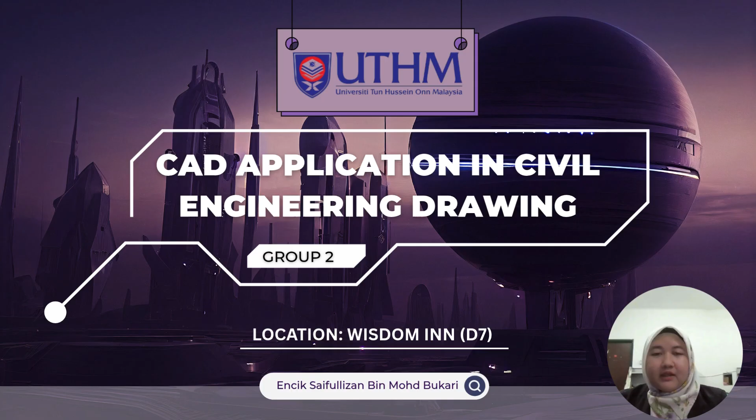Our location is at Wisdom Inn D7. I will explain about our company, CODraftX Consultant Sdn Bhd, a Malaysian-based company specializing in technical drawing services using AutoCAD, offering comprehensive solutions for construction, mechanical, electrical, and landscape industries, focusing on precision, quality, and fast delivery.

Our vision is to become Malaysia's leading reference company in high quality technical drawing services. Our mission is to deliver professional and precise technical drawing services, meet client requirements efficiently and promptly, and support industry development with the latest technologies.

Our services include architecture drawings, mechanical and electrical, structural drawings, 3D modeling and rendering, and technical drawing construction and review. Our company's strengths are an experienced and trained team, high quality accurate drawings, competitive pricing, and friendly, reliable customer support.

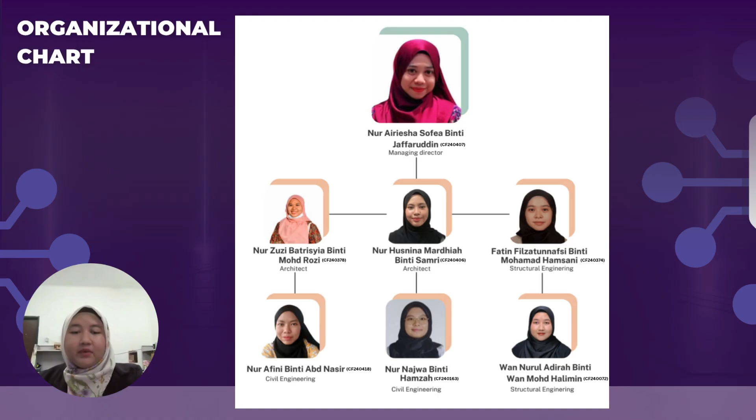This is our organizational chart. We start with Nur Airiesha Sofea binti Jaffaruddin, the managing director; Nur Zuzi Batrisyia binti Mohd Rozi, the architect; Nur Afini binti Abdul Nasir, civil engineering; Nur Husnina Mardhiah binti Samri, architect; Nur Najwa binti Hamzah, civil engineering; Fatin Filzatunnafsi binti Mohamad Hamsani, structural engineering; and Wan Nurul Adirah binti Wan Mohd Halimin, structural engineering.

Our group has chosen the site location which is Wisdom Inn in UTHM. Wisdom Inn is located at the Centre for Diploma Studies, UTHM Parit Raja, Johor, selected for its simple yet structurally challenging 4-level design, ideal for both architecture and civil engineering analysis.

Strategic location, near major retail outlets such as Lotus and commercial complexes, with convenient access to daily needs and leisure activities for students. The UTHM Parit Raja campus is fully equipped with modern academic and daily facilities, providing a conducive environment for student learning and project-based work.

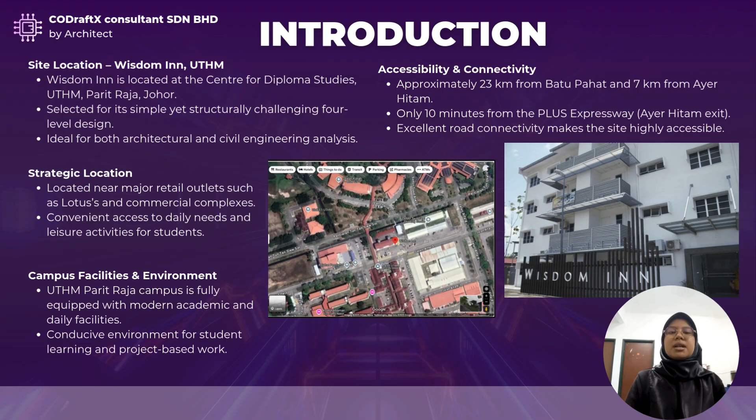Accessibility and connectivity: approximately 23 km from Batu Pahat and 7 km from Ayer Hitam, only 10 minutes from the PLUS Expressway Ayer Hitam exit. Excellent road connectivity makes the site highly accessible.

For the features of the building, Wisdom Inn has a four-level student residence located at UTHM Parit Raja, Johor. It is strategically located, 4 minutes to Taman University and 9 minutes to Parit Raja town, with easy access to the cafeteria, G3 Hall complex, and campus bus stop.

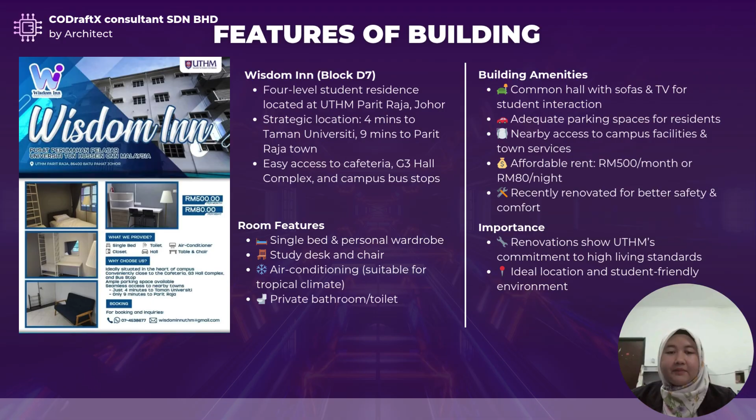For room features, it has a single bed and personal wardrobe, study desk and chair, air conditioning, and private bathroom. Building amenities include a common hall with sofa and TV for student interaction, adequate parking spaces for residents, and nearby access to campus facilities and town services. It is affordable to rent, at 500 ringgit per month or 80 ringgit per night, and has been recently renovated for better safety and comfort.

I will explain the materials used in construction and the importance of material selection. First, materials ensure structural strength, functionality, comfort, and sustainability. This is crucial in apartment-style buildings like Wisdom Inn at UTHM, supporting a safe, durable, and eco-friendly living space.

Structural materials include reinforced concrete for foundation, beams, slabs, and columns; steel, with high tensile strength used in load-bearing support; and clay brick or concrete block for partition walls, durable and fire resistant. Finishing materials include plaster and gypsum board for smooth, fire-resistant interior walls.

Ceramic tiles provide durable, water-resistant flooring for bathrooms or general areas. Paint and coating offer visual appeal and protection against moisture. Glass with aluminum frames are used for modern windows, with corrosion resistance.

Utility materials include pipes and fittings such as PVC and copper for corrosion-resistant plumbing, and electrical wiring using copper and aluminum for safe and efficient circuits. Thermal and acoustic insulation improves comfort and noise control. Roofing uses concrete tiles or metal sheets for durable weather protection.

Innovative and sustainable materials include recycled waste materials used in bricks for sustainability, and low carbon cement to reduce environmental impact, tested by AMEL UTHM, featuring innovative concretes and advanced blends.

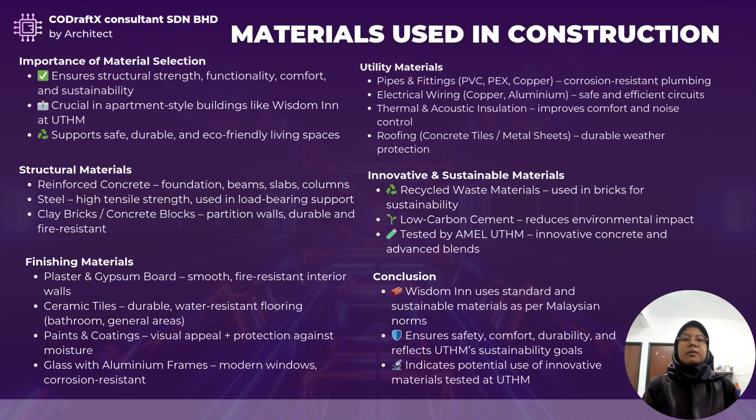In conclusion, Wisdom Inn uses standard and sustainable materials as per Malaysian norms, ensuring safety, comfort, and durability, reflecting UTHM's sustainability goals and indicating potential use of innovative materials at UTHM.

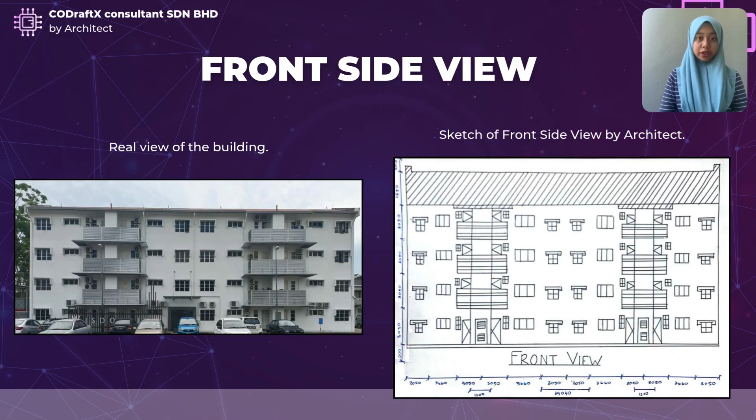So the sketch is a simplified version, but it is useful as a reference before we move into more detailed CAD drawing. Next, we continue to the second slide, which is a front side view sketch and AutoCAD drawing.

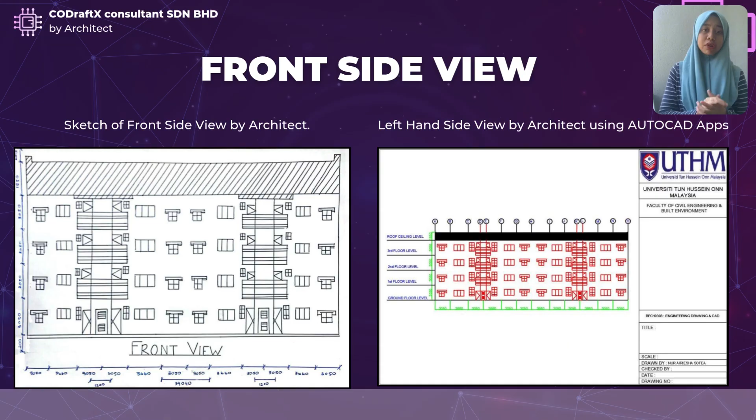This slide shows two types of building views. On the left, we have the manual hand sketch of the front elevation, which shows the arrangement of windows, doors, balconies, and staircase. On the right, we can see the left-hand side elevation produced using AutoCAD software. This drawing provides more accurate measurements and technical details which are important in actual construction. By using AutoCAD, the building dimensions, window placements, and floor levels are clearly identified to ensure the design follows the specifications and standards required.

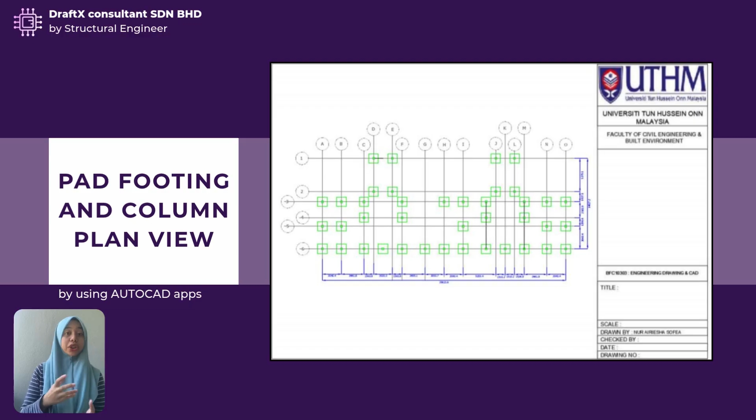This plan is very important because it will guide the contractor during the foundation stage to make sure all the columns are properly aligned and positioned based on the design. Without this plan, it will be difficult to ensure the structural stability of the building. It also helps to prevent any possible errors in construction.

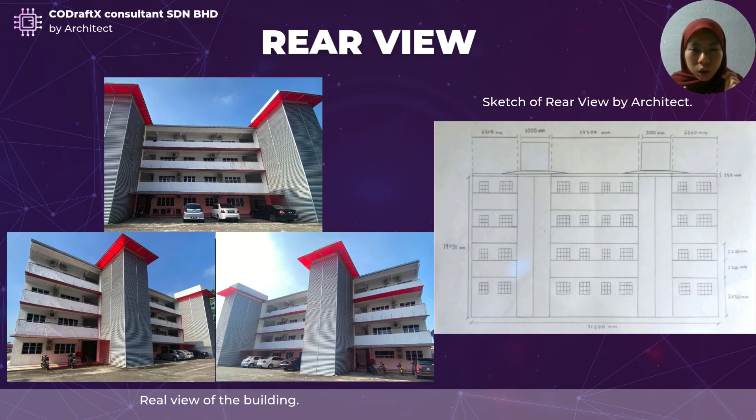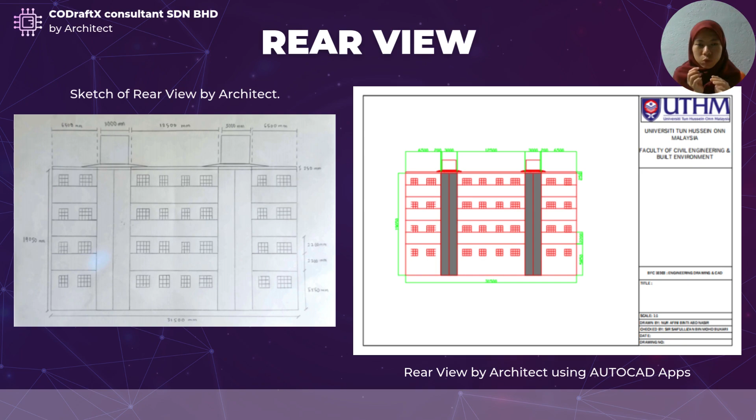From the sketch rear view by the architect, we can create a drawing using AutoCAD software to get more detailing of the building dimensions and to get some specific materials used for the building.

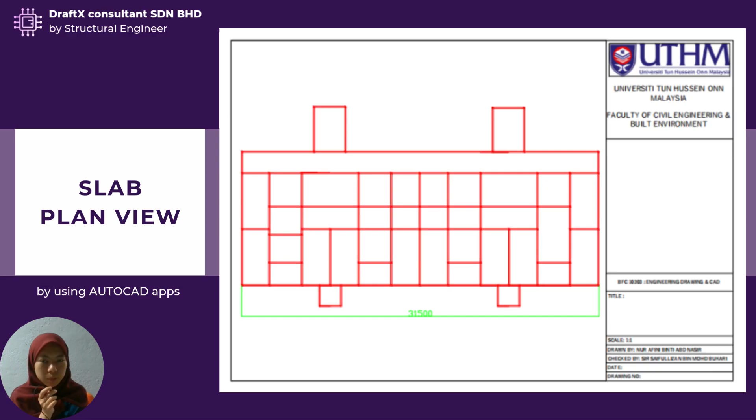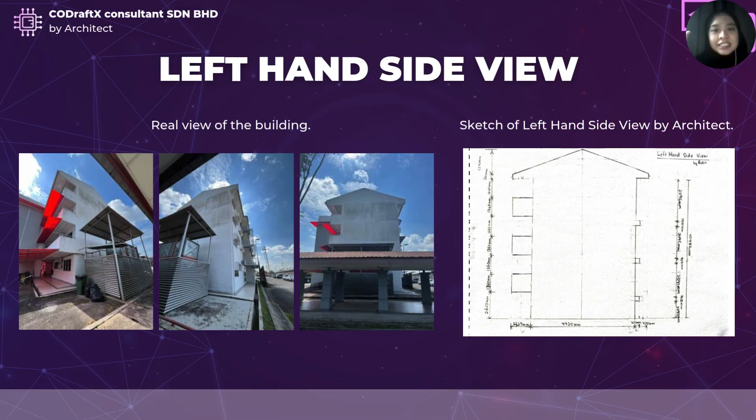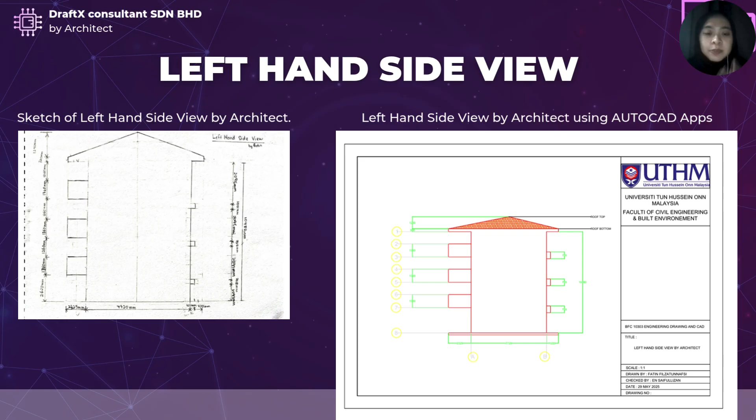So the wall finishing and the roof design are also reflected in this elevation. Overall, the left-hand side view created in AutoCAD provides a precise and detailed architectural representation, helping us to visualize from the specific angle before the construction begins.

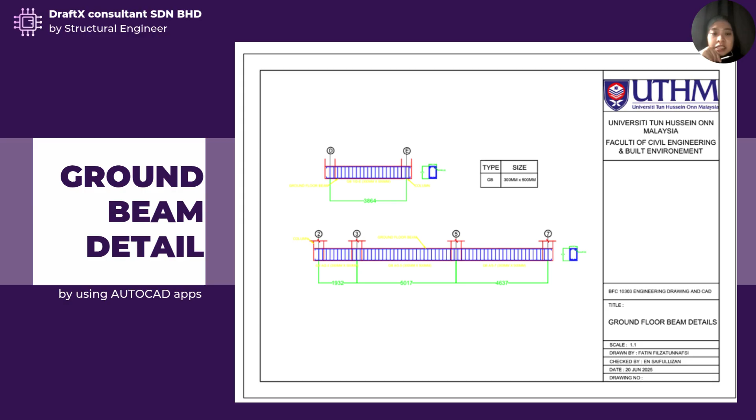The ground beam is connected to pile caps or footings at each column base with proper starter bars to ensure structural continuity. Overall, the ground beam detail is designed to provide a stable foundation system and tie the structural elements together effectively.

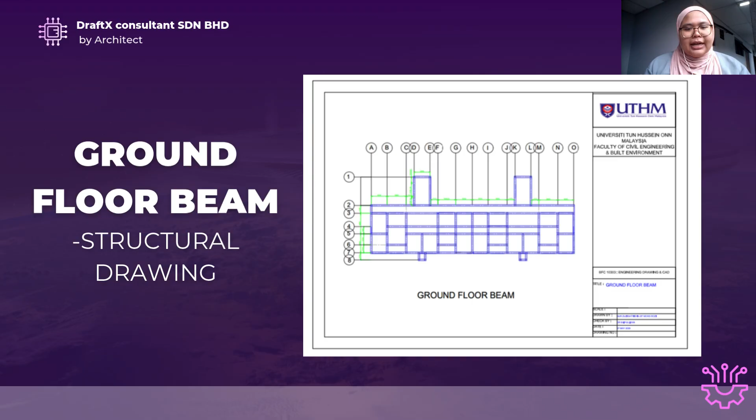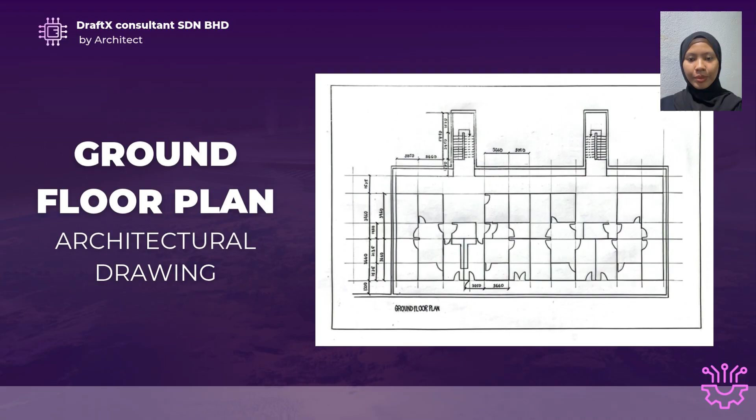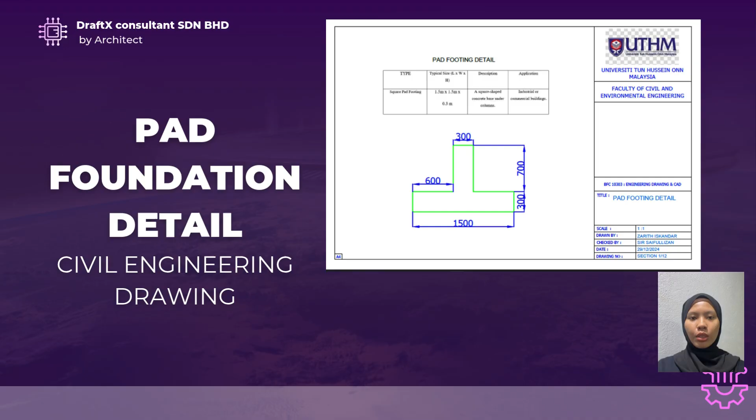This type of footing is commonly used in industrial or commercial buildings, as it effectively distributes loads to the ground. The detailed dimensions shown here, such as 600 millimeter offset, 300 millimeter column base width, and 1,500 millimeter total length, allow accurate placement and sizing during construction.